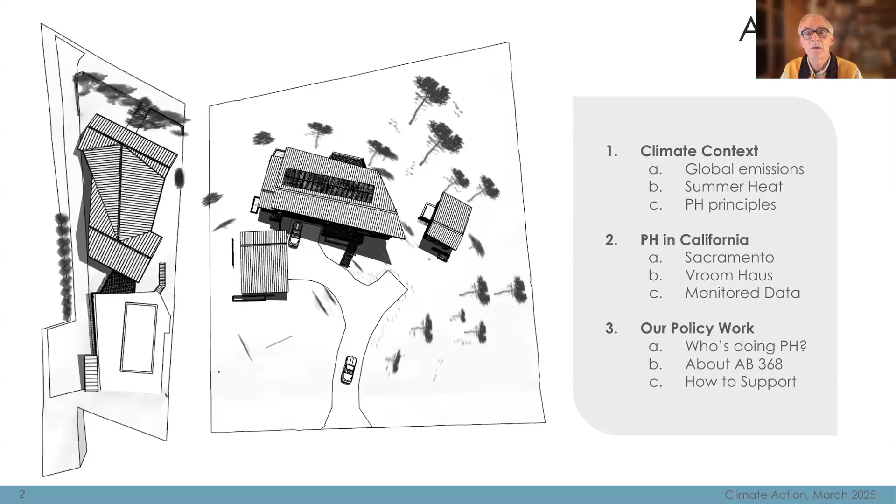So here's this villain's MO, and I'm sure you've all seen this graph many times before. This shows carbon dioxide concentrations in the atmosphere for around the last million years, 800,000 years to be specific. It's often observed that the highest carbon dioxide concentration during all that time was 300 parts per million, but that was around 400,000 years ago, well before any modern humans showed up on the scene. The background level was roughly around 250 parts per million over all of that time. As you can see, we're up at 419 now. It's not so important what the numbers themselves are, it's just that proportional difference - we're about 1.6 times higher than that background level. And it's nothing that humans have ever really lived with as a species.

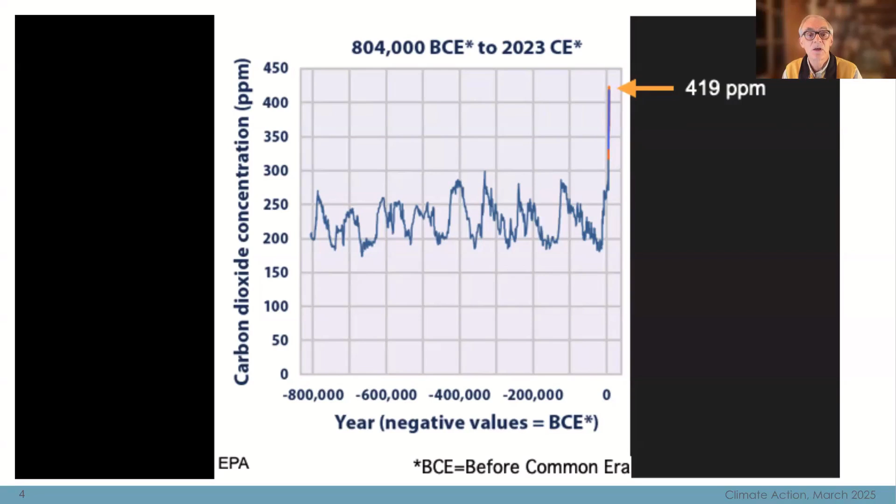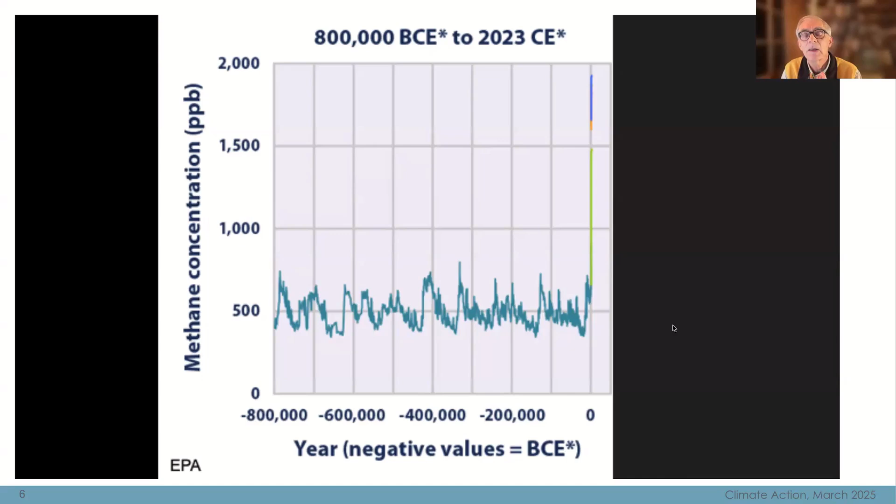So this is methane concentration in the atmosphere. All I want to point out here is that for around the last million years you can see very stable levels, a little bit of periodicity there, but until the industrial era began, and now it's rising very quickly. What I want to point out is that the level of rise of methane is very disproportionate to what we saw with carbon dioxide.

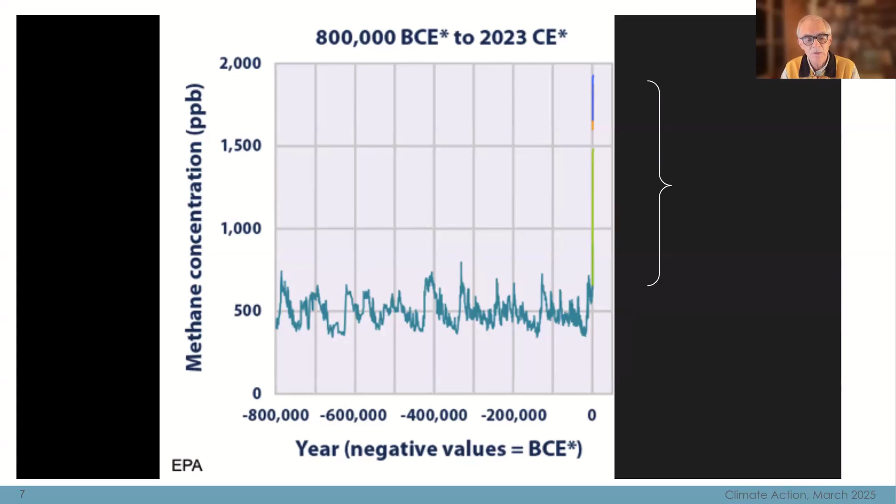Next slide, please. And that's because, as you probably are aware, the global warming potential of methane is 84 times that of carbon dioxide over the time of interest that matters to us.

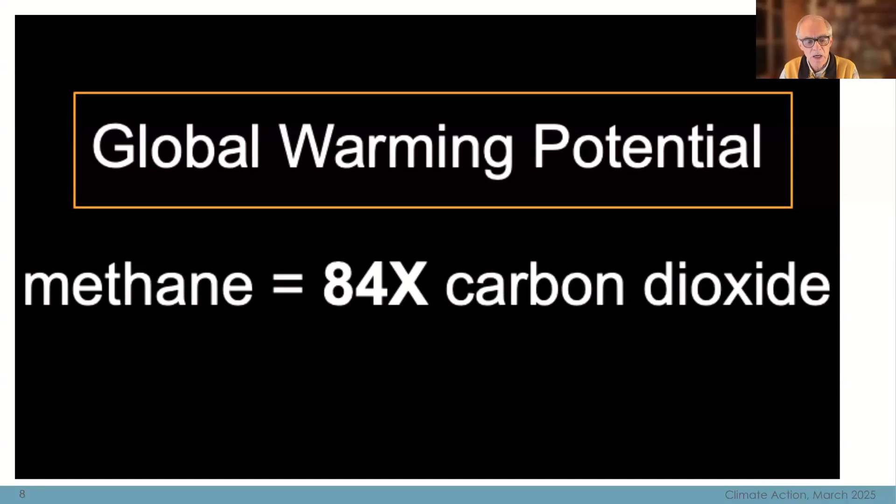So gas leaks, methane in cities are ubiquitous, and the leaks are prevalent enough to pose a significant risk to climate stability. It's as dangerous as burning coal. All the forecasts we get from CO2 entering our atmosphere, methane is contributing just as much risk.

And here, this is an echo sounder image of methane bubbles escaping from the clathrates on the ocean floor and bubbling to the surface. That rate of increase of methane release from the floor is increasing significantly as the Arctic Ocean warms.

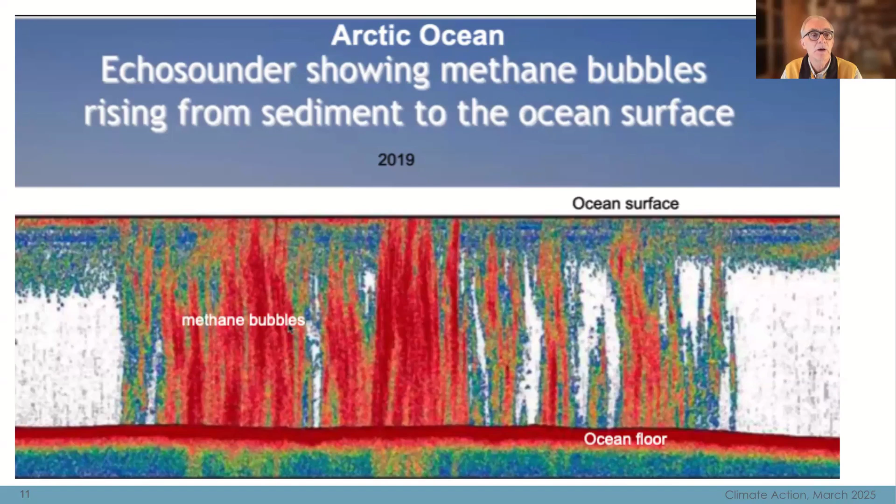So this is a distribution of summertime temperatures in the Northern Hemisphere. On the left, that grayish distribution is the 50s through 1980. And that distribution there, you can see the right-hand tail, where what used to be considered hot back in the good old days is now just an average temperature of this distribution from 2013 to 2023.

Click to the next one, and you can see the advance in the average from the baseline, the 51 to 80 distribution. We now have warmed significantly, and now we have these extremely hot tails over on the right. That's what we have to be aware of.

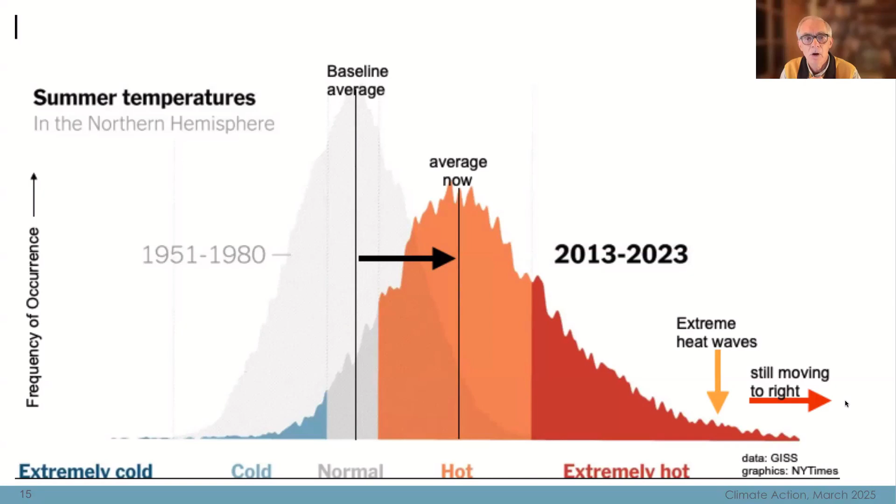So now we have these extreme heat waves that are occurring. Half of this extra heating is attributed to methane in the atmosphere. As those levels increase, we're going to still move to the right with those tails, and heat waves are going to become hotter and hotter as we continue to increase those concentrations.

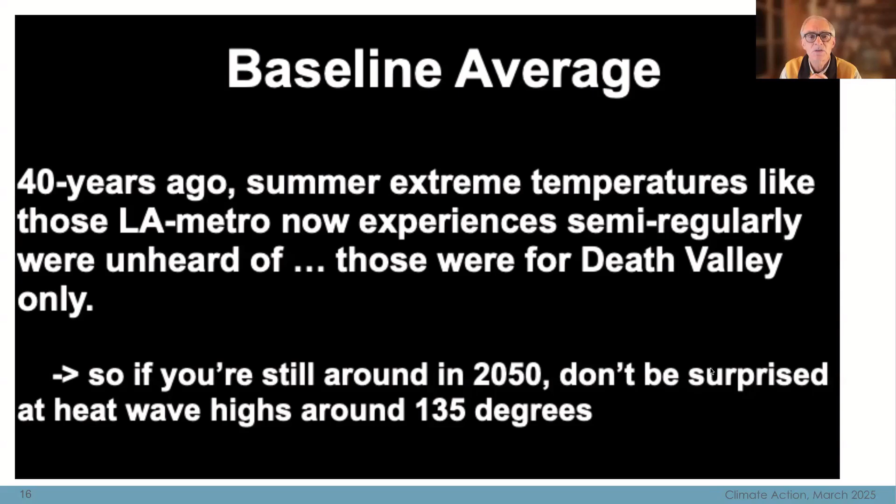So 40 years ago, extreme temperatures like we're experiencing now, occasionally in the LA metro area, were unheard of. Those were Death Valley temperatures. So if you're still lucky enough, or maybe unlucky enough, to be around in 2050, don't be surprised at heat wave highs around 135 degrees. That's not just a wag, that's a back of the envelope calculation, not a rigorous calculation, but there is some analysis behind it.

So is California's building code ready for temperatures like that? The shorthand term for the California building code is Title 24. To get a building permit, buildings have to undergo energy simulations, and those simulations have to employ a typical meteorological year, or TMY, a weather file that's a collection of average climate conditions from historical data. So even now, past data is being used for predicting performance of buildings that are intended to last the next 60, 80, 100 years.

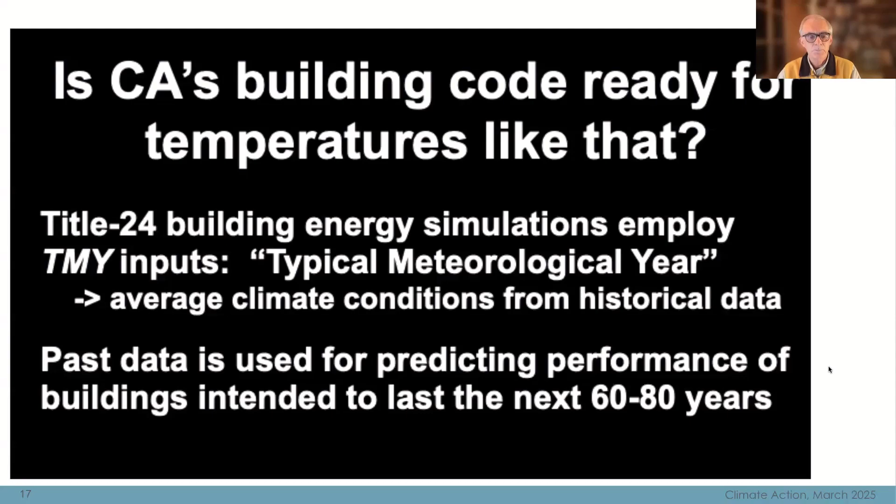So these TMY files do not represent future weather. We need to design for resiliency over the building's lifetime. Energy simulations must incorporate future weather conditions, and the California code does not require this.

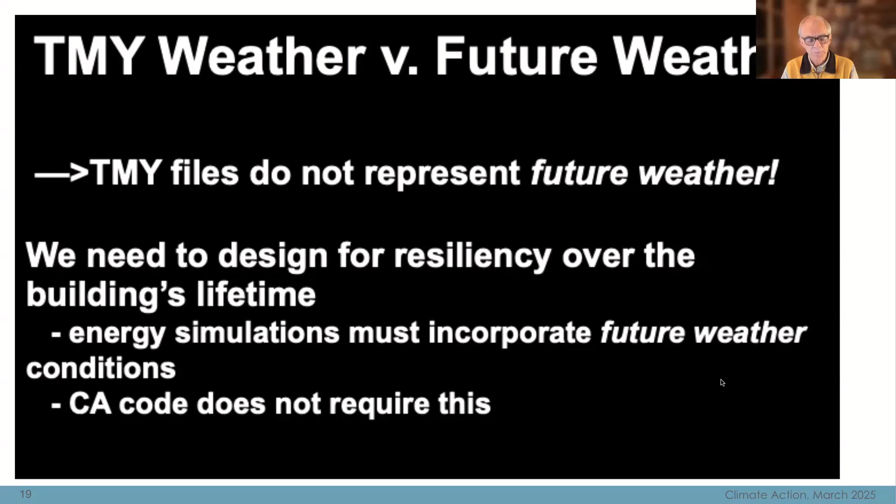So now passive house has a toolbox with a tool set that includes an option for future weather. You can see an example here from Burbank. On the left is this so-called TMY file, and then you can adjust it by increasing the mean temperature in the passive house toolbox. Now that's only increasing the mean, it's not extending out those tails, but this is at least a step in the right direction.

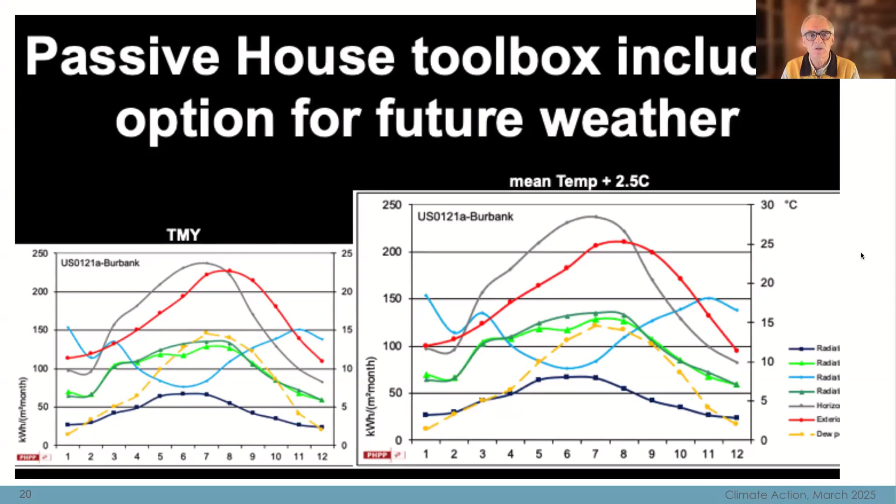And this is especially important because when you use the Title 24 procedure, it's just a black box—you stick in all the inputs that you're told to put in, and then something just emerges from the end. With passive house it's much more user-friendly and flexible, and the user has those requirements and can adjust those inputs.

Anyway, so what's so special about passive house?

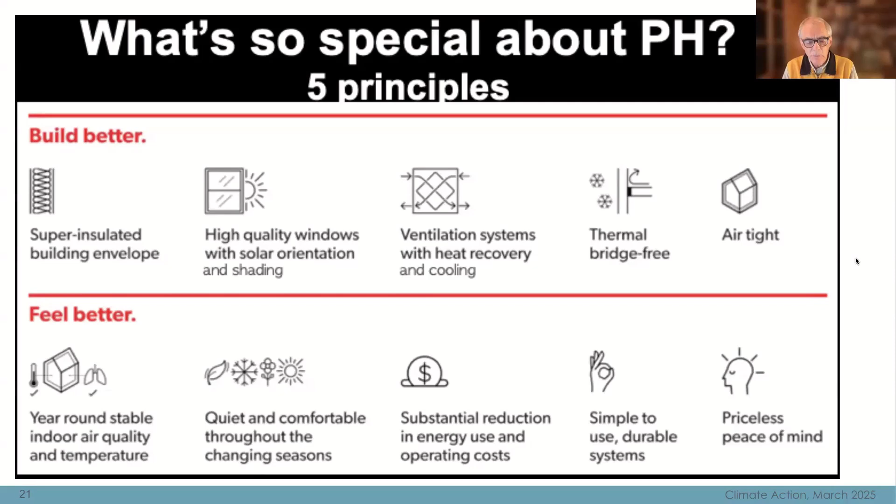In California, passive houses use 50 to 70% less energy than baseline homes. That's achievable by following 5 principles.

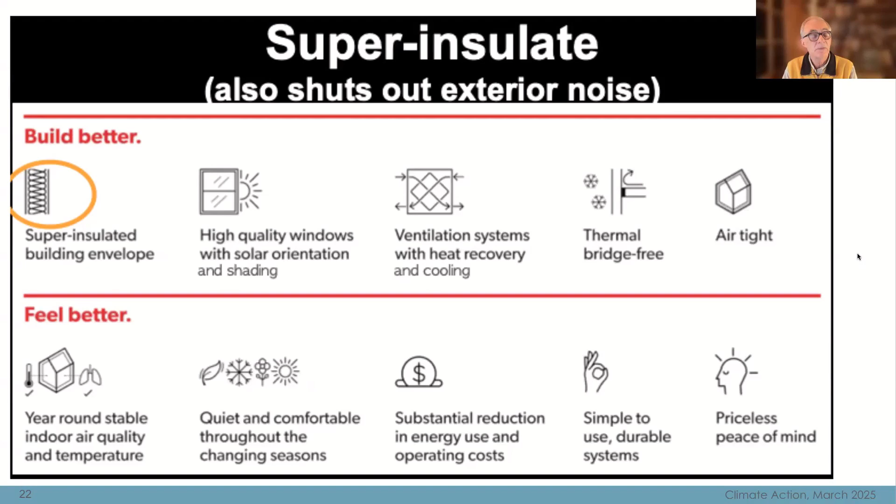So let's super insulate. You super insulate walls, floor, and ceiling, so much so that in the winter, the house can be heated with nothing more than a hairdryer. And by including future weather in their design, passive house offers even more cooling load reduction in the summer than it would get otherwise. So then another principle is installing high quality windows and adding shading where needed.

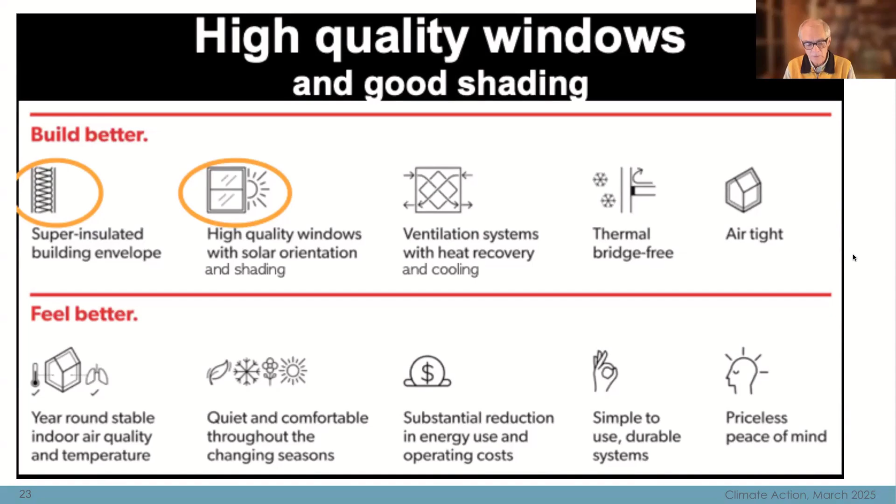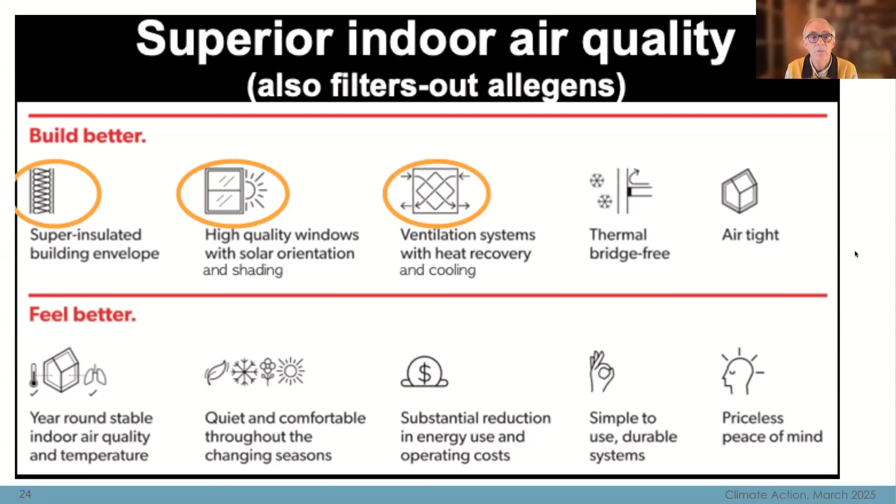Install ventilation systems with heat and cool recovery. And this also cleans the intake air because the air is filtered.

And there's something called thermal bridges. That means designing out places of excessive heat loss and gain right in the architecture. So you just design it smart from the beginning.

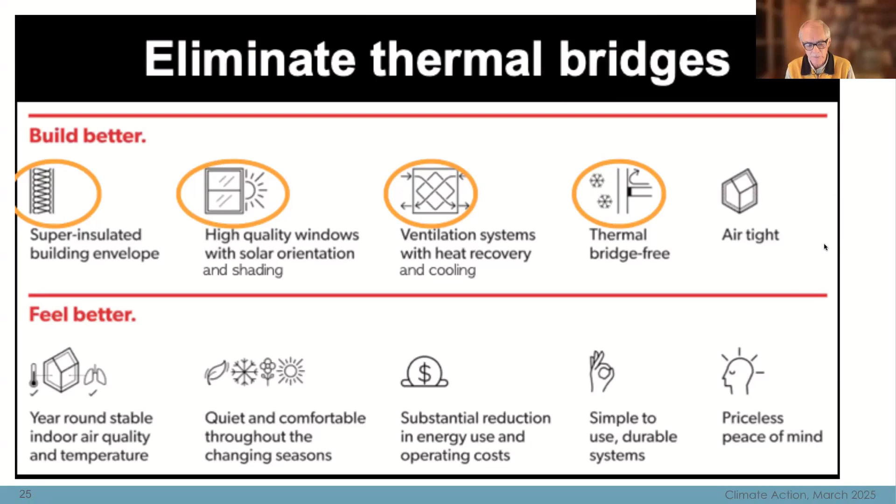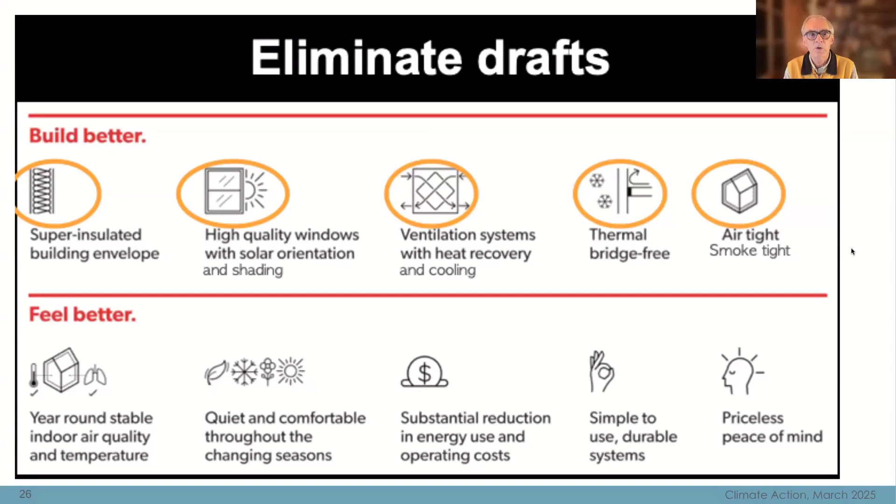And then let's eliminate drafts. Make the home really airtight and really smoke tight. And when you do this, homes really don't need much energy to operate, and they especially don't need gas, none at all. So they're just a superior kind of home for electrification.

So what does a passive house look like? Now I'm going to turn it over to Bronwyn, who is the real genuine passive house master here.

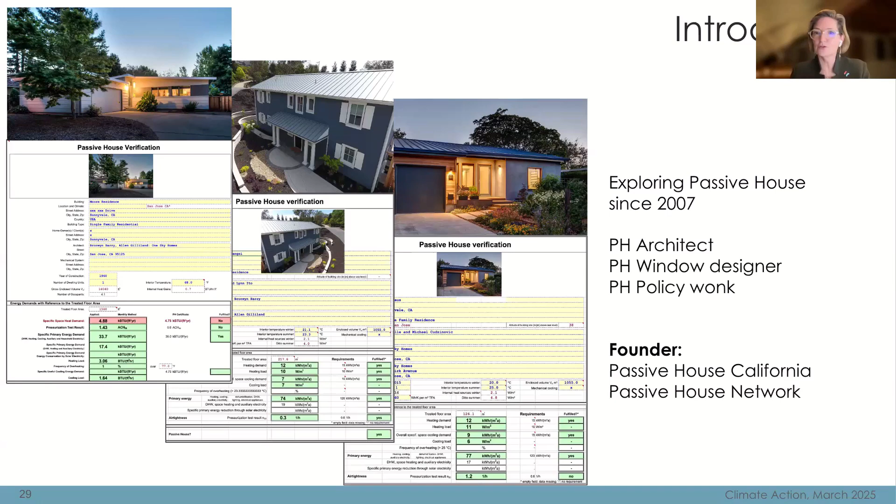And I'll share this other project. This was a winner at the Architecture at Zero competition in 2022. It's an affordable multifamily development, designed for Visalia, California — Central Valley, small sort of mid-size 4-plexes and 6-plexes designed all to Passive House. Unfortunately this project hasn't got built yet, but I'm really hopeful that will happen.

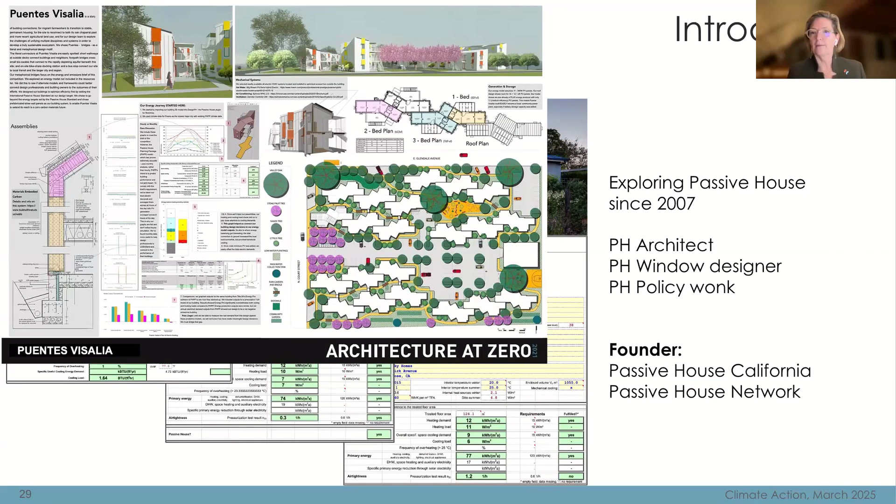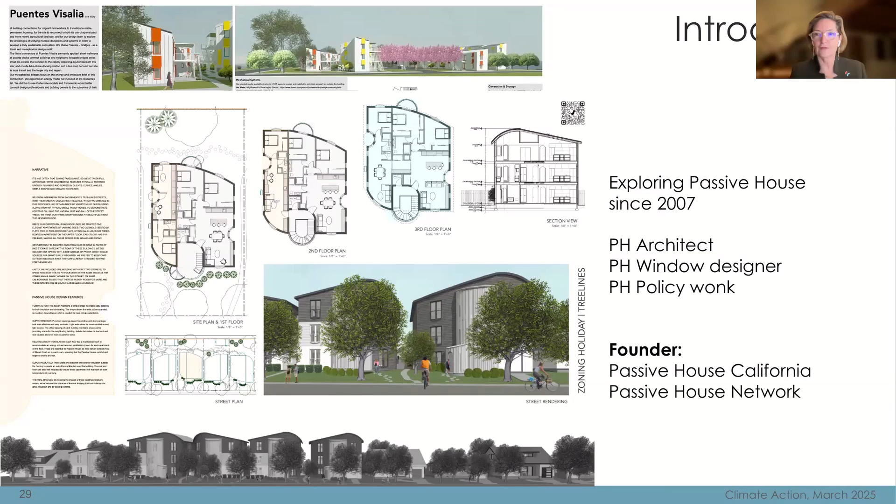But I really just want to show you some other typologies I've been working on, because this isn't just for single family homes. Another project I did for Sacramento envisions how we can build 2- and 3-story buildings that fit within the same sort of suburban street context. The streetscape is down below, you'll see it in my slides — these are actual real homes on the right here. I really want to show people how we can put these buildings in regular neighborhoods where they fit beautifully and do all the things we need to help transform our building industry here in California.

So next I'm going to show you a very recently finished project. I designed this for a building analyst who works at the California Energy Commission in Sacramento. He wanted a certified Passive House, built as a plus energy home. We reused a lot of the older existing home he and his wife were living in, and really modernized it, designed as a modern craftsman bungalow.

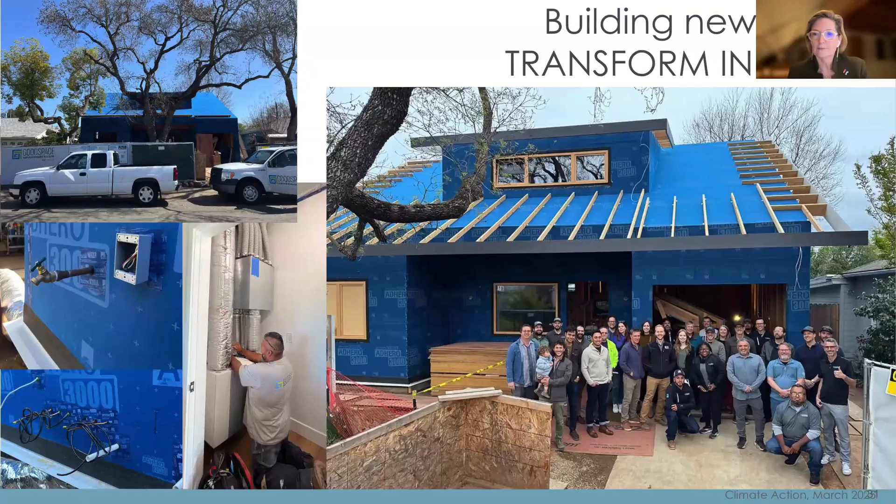This has been a great experience in helping show builders, architects, and policymakers around Sacramento. We used this house, the first certified Passive House in Sacramento, as a great catalyst for showing people what's possible. You can see how we're using all the techniques Rob outlined, the 5 principles of Passive House. We got a really super airtight envelope, and added overframe rafters overhead.

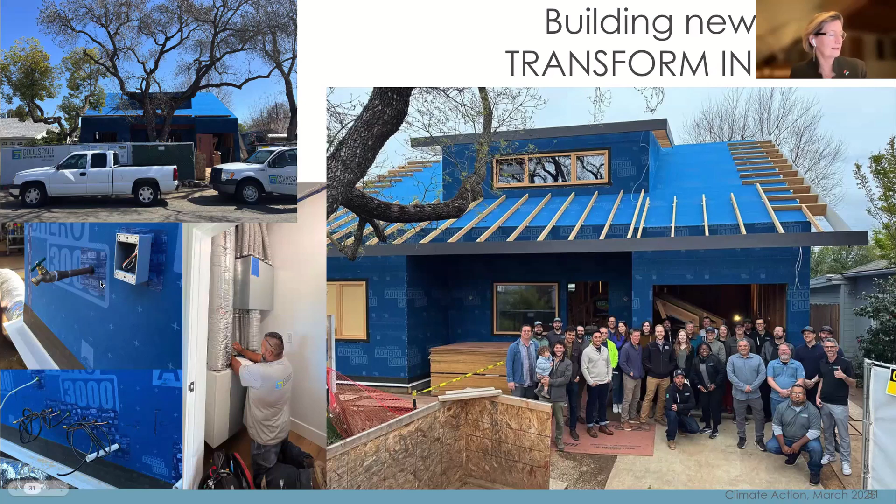On the left, these two slides show how we sealed all the penetrations, because air tightness and smoke tightness is of serious value. I think everybody now really understands why we have to build this way in California. In the middle, you see one of the crew from Good Space Builders who built this home, installing the ventilation system that allows all the air to be filtered as it comes into the house.

The crew here, this was a BS and Beer meeting that happened on the site. We opened it up for many open houses, and really it's showing not just one builder what's possible. He's embraced this, but I have the great honor of working with a lot of builders building these projects all around California, and everyone brings in other curious builders, policymakers, and architects to show them how we can do this.

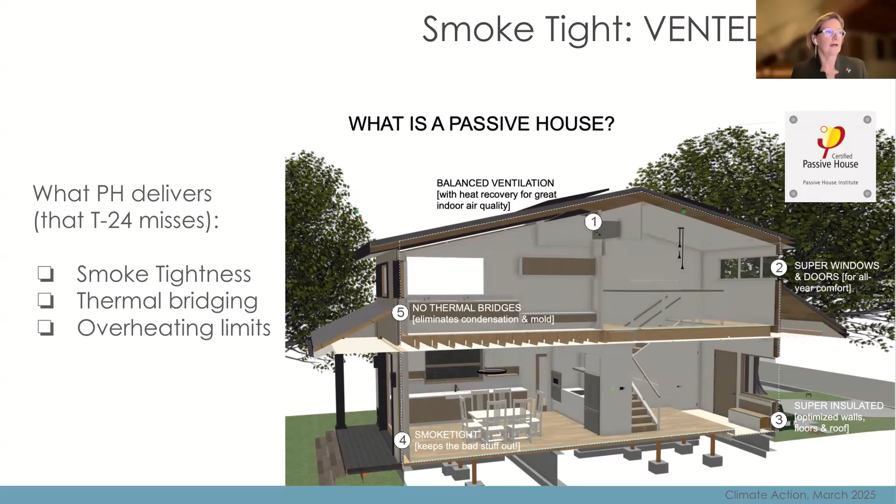The last item, which Rob touched on, is the climate data, the temperature, and the overheating limits. Passive houses have strict ceilings for what the indoor temperature can reach, and you can design that out from the get-go. But until you put that on the model and set a limit for it, it's never looked at. So these are really great superpower items that Passive House in California can support our climate goals and what we really need to do for climate resilience and survival.

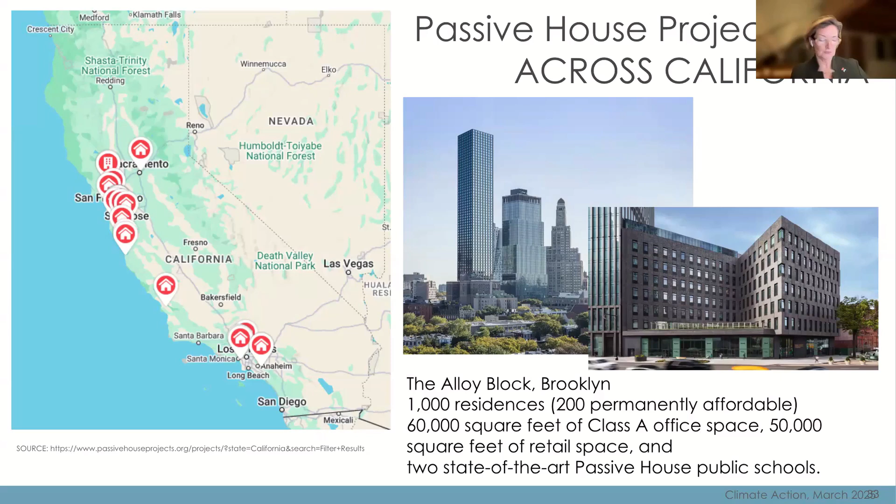I wanted to tell you, this one building alone has more certified Passive House square footage inside it than we have in the whole of California. So I have really wanted to change that number and get us caught up to all the fabulous action that's been happening across the country.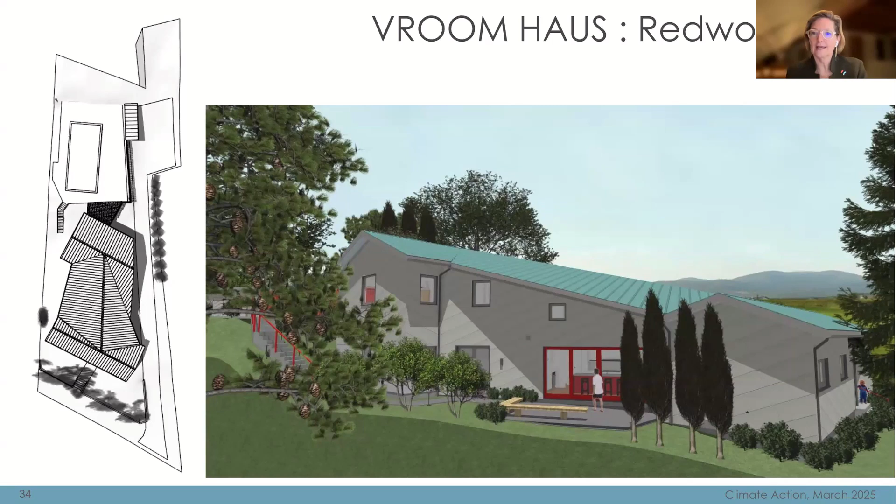Just to give you a sense, and we're digging into the policy and the strategy we're employing, but I want to tell you why we started to look at adding an alternate compliance pathway into Title 24. As I said, I've been doing this for a long time.

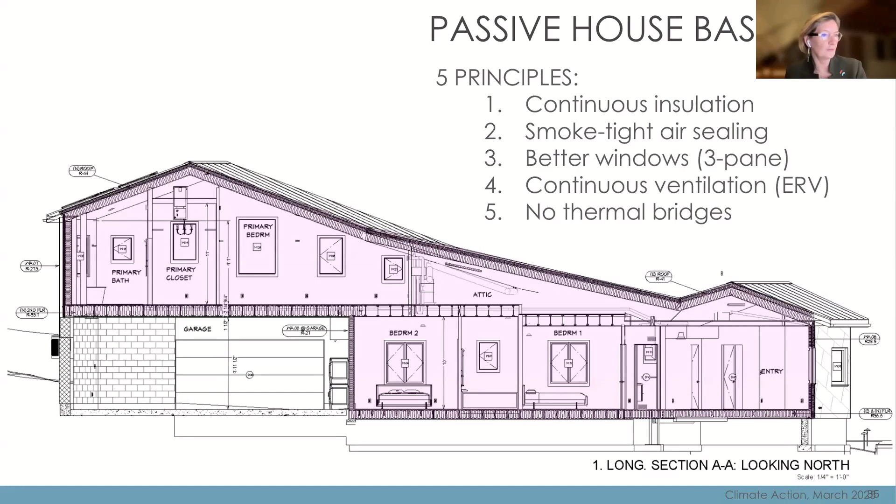This is a project I'm working on in Redwood City. It's a retrofit, sort of a partial retrofit in a new build, with all the passive house features. And when it came to my permitting, here's my Title 24 performance numbers. Here are my passive house numbers in the middle. And the blue column is the baseline bare minimum that I have to build in California.

Because I have to do a separate model for passive house that I've come to really trust and value for its accuracy, every time I submit these to my permit officials, they scratch their head and go, 'What are you doing and why are you doing this?' Because it's different, and it doesn't quite fit in the same box as what they're used to dealing with. This code official made me put this graphic together so that I could compare them side by side, because he didn't believe that what we were doing was better.

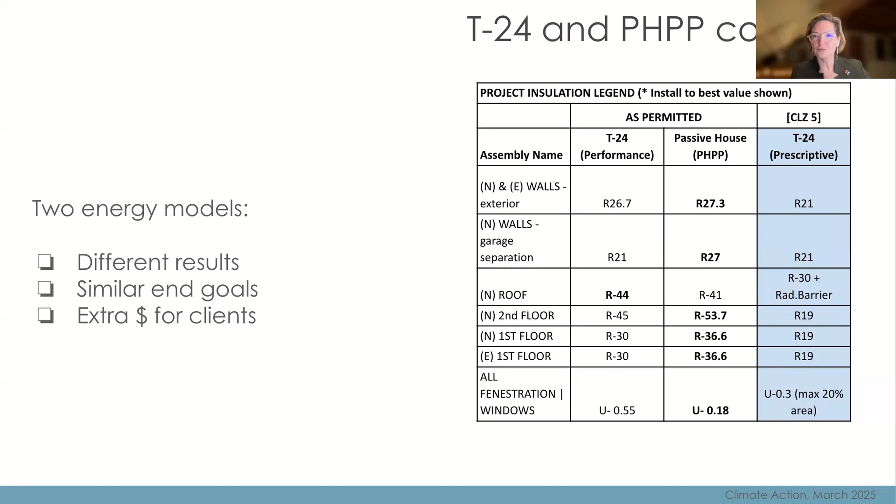So it creates constant conflict between my Title 24 model and my passive house model. I'm not going to go into the nitty-gritties, I've ranted online about this for many years, because there are always things in my passive house model that have not yet shown up in my Title 24 model. And we are continuously punished for doing better, which seems to be a bit of a problem.

So we have really done a lot of work to get verified data to help show people at the CEC why we want to do this and why we should not be blocked from doing better.

This again is the same house you saw in some of the earliest pictures, a nice 3-bed, 2-bath family home in Sunnyvale, California. I was able to monitor it for 2 years and get hourly data. This is January through December down the bottom, and the yellow line is the sipping energy that this house uses all through the year. What's so remarkable about this is it barely goes up and down over this 500 kilowatt hours line. The blue line, the light blue line, is what my passive house energy model predicted.

So we are actually way under, we're overperforming or underusing energy according to my model, which is designed to be a conservative model. The dark blue line, I managed to get, through the utility, they publish the energy data, and this neighborhood happens to be a whole subdivision that was built post-war, all the same 3 house models, all the same footprint. So pretty good, accurate representation. This is the average energy use for every home collectively in this neighborhood.

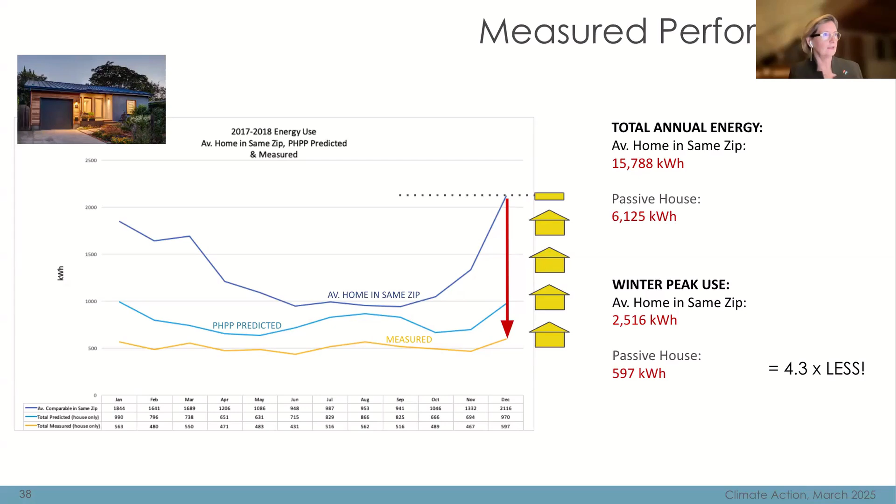I was able to send the hourly data I collected for 2 of my projects, the one in Alamo you saw there and the Sunnyvale one, to the CPUC, and they hired a company that also had hourly energy use data for 5 ZNE homes, zero net energy homes, much better than baseline code in the same climate zone. And they were able to use this data to compare my passive houses.

So the red line are the passive houses and the blue line are the ZNE homes. And what they found in summer, these are the hourly months for June, July, August, the peak cooling months, my passive house project had no summer peak, which even surprised me by how significantly lower my project was, because passive houses have traditionally been considered champions for winter load reductions.

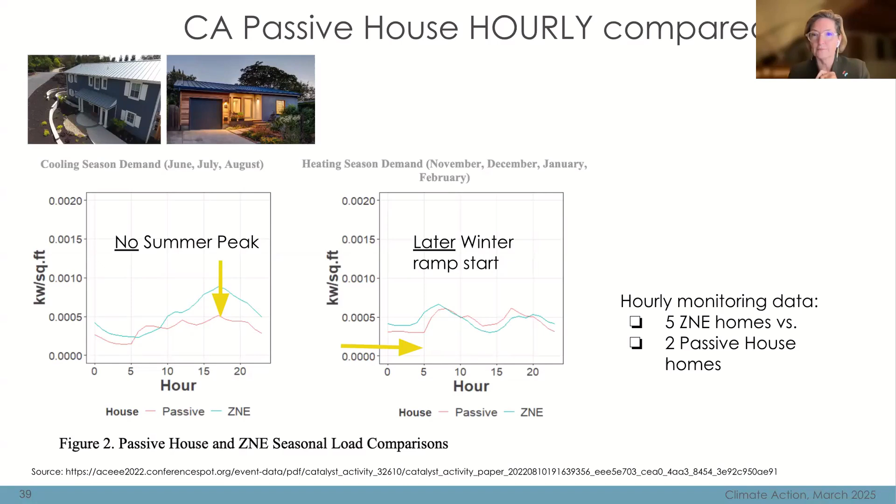So those of you familiar with grid dynamics, the ramp rates and the start times are really critical for utility and infrastructure development, particularly as we electrify and decarbonize. So there are my passive houses acting like superwoman across these climate zones and knocking the socks off the ZNE homes in the same climate zone.

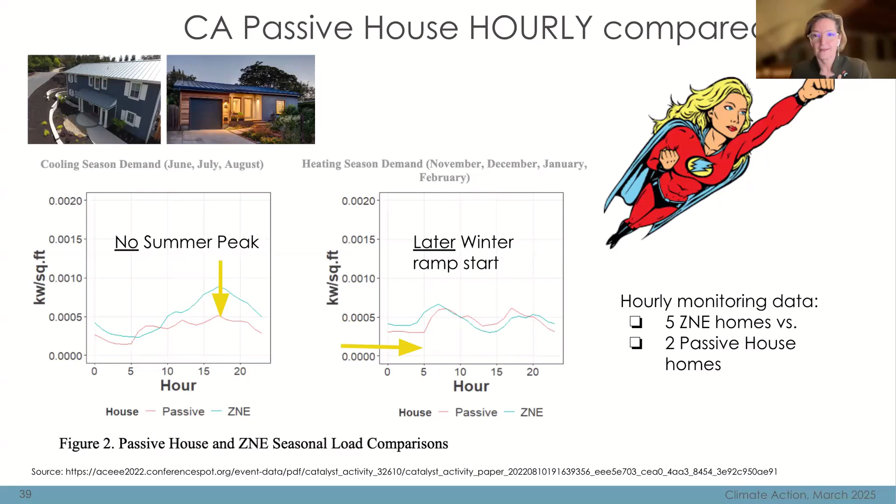And I'm not the only one who's found this. A colleague of mine, Graham Irwin, whose company is Essential Habitat, he's been doing passive houses as long as I have. He did this study finding how passive houses in this climate zone were able to, for every one code compliant building you built in each of these climate zones, you could build 6 passive houses in Sacramento that would use the same amount of energy as one code compliant building.

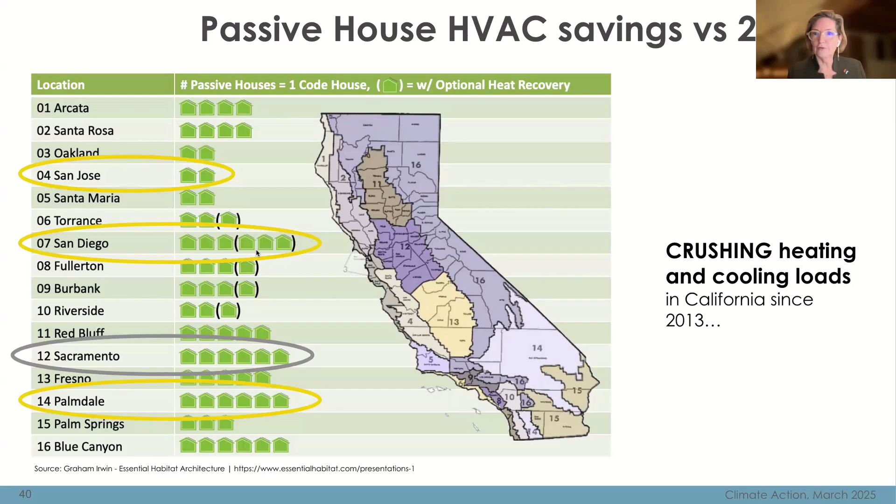And you can see across California in the milder climates like Oakland, San Jose, Santa Maria, the savings aren't quite as much, but in the hotter climates, Palmdale, Sacramento, San Diego, passive house is looking really good. And it's really helpful for all the heat load, the brownouts, because where we get our brownouts in California is in cooling season, right?

This other report, issued last year, was done by a consultant at Certifier based in Denver, Colorado, who has been working with project teams across the U.S. He collected data for 50 homes across the entire U.S., 11 of which were in California, and this map shows where they are: northern and central, one in Tahoe, and the rest down in the San Diego and LA region. He compared the outcomes in the modeling software between California's Title 24 and the various passive house standards available to us here in the US market.

Finding again and again that passive house—the PHI version, which has a couple of options, low energy building and the classic—is still significantly outperforming California's Title 24 for heating and cooling compared to the baseline standard.

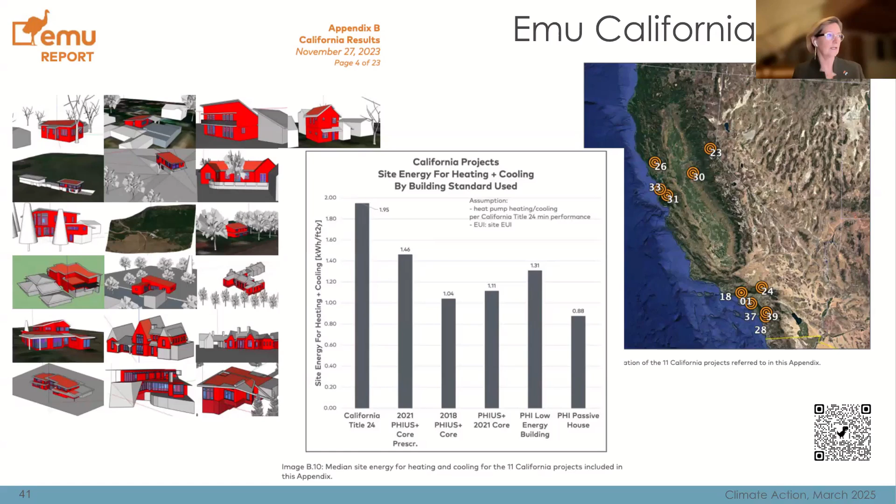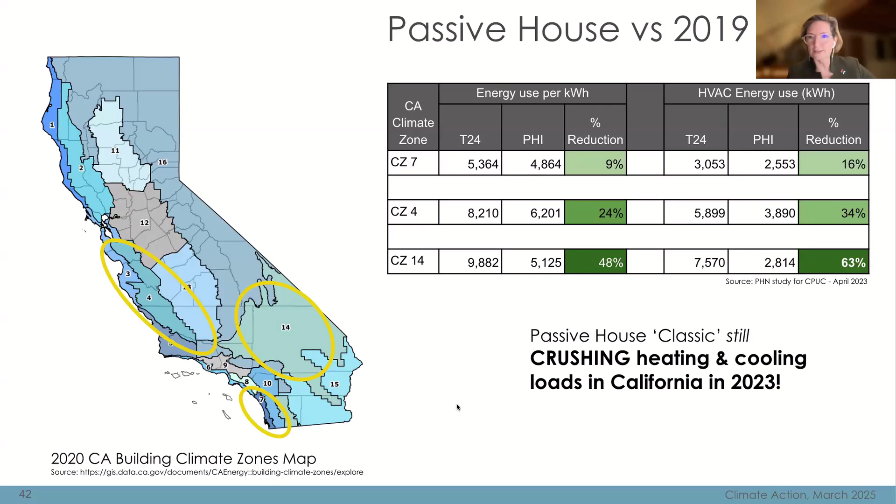When we looked at multifamily, a low-rise multifamily building for a study we were supporting CPUC on, we found in the climate zones where they predict most multifamily buildings will be built—climate zones 4, 14, and 7, you can see exactly where they are geographically—again double-digit savings reductions, except in climate zone 7, which is the pretty mild San Diego area, in total energy use. But the savings were significant in heating, ventilation, and cooling energy use, up to 63% in climate zone 14, that hot Central Valley area.

Rocky Mountain Institute has released a study on passive house resilience. It was done for a cold Minnesota climate, but the function and the result for a hot climate would be approximately the same, because what passive house does is allow you to keep the cool air in longer and keep the heat out for longer during extended periods of utility shutdowns.

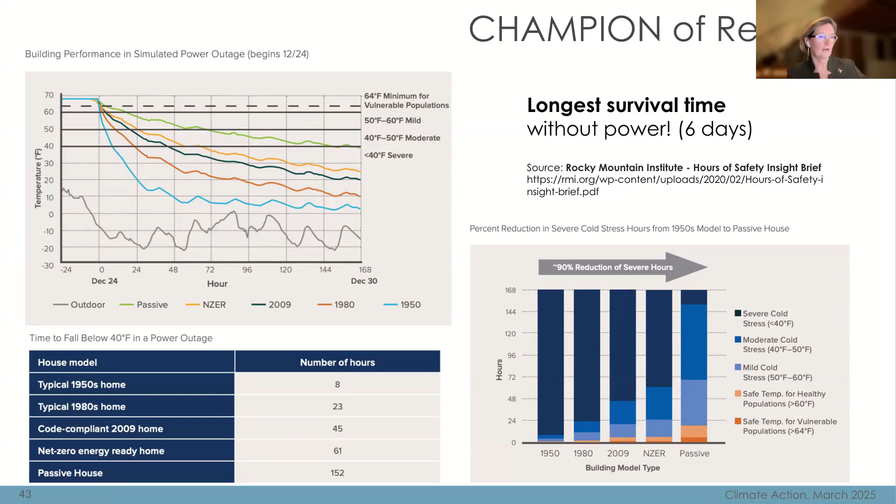You can see on the top left here, this chart, the green line is the passive house building, which was able to remain habitable for much longer, and never went down below the 40-degree cutoff of habitability. This was for 168 hours, so 6 days of extended utility shutdown, again proving that we really have a resilience champion on our hands, that we are able to deliver this.

So we've given you lots of data here, and I want to now bring it back to the policy narrative, because what we have found here in California is that really being able to do this more regularly has been very hard. So we did a big research study, and we looked at who else was doing this and how they were managing to get more projects built that really supported industry transformation.

The first region to really leverage passive house as a real tool to transform its entire building industry was Brussels, starting around 2004. They put out a call for projects to submit to show how they could do better. Brussels was actually one of the worst offenders in terms of building emissions in all of Europe, which was very embarrassing given that they were the headquarters for the EU. They established a program that offered incentives, training, and a little bit of financial support for early adopter front-runner projects, all of which chose voluntarily to use passive house.

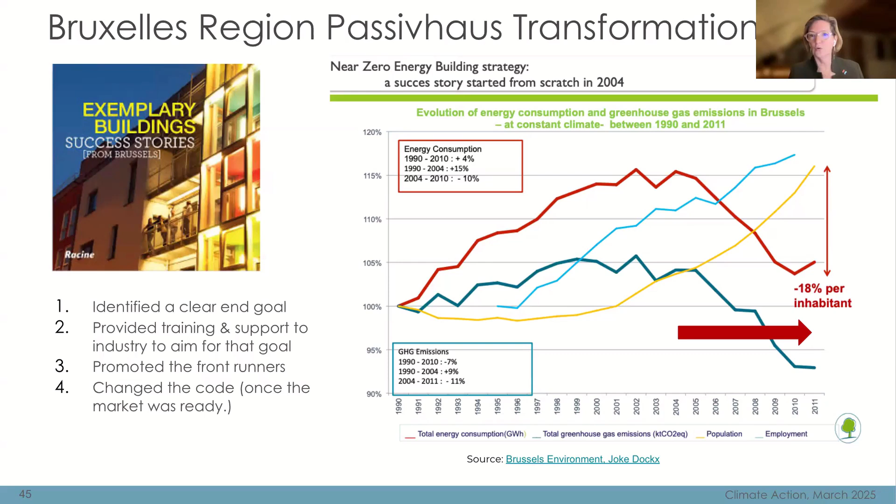Massachusetts also learned of this program in Brussels and decided to implement a very similar one. Massachusetts put together an incentive program that offered training to professionals, incentives for energy modeling their projects to passive house standards, and a little bit of financial support for front-runner projects to help cover the cost differential.

In the 8 years they've been doing it, this has allowed them to reach a point where there are now 21 municipal districts in Massachusetts that require passive house certification for all of their multifamily buildings. And they have transformed their entire baseline code to mimic passive house.

Vancouver did a very similar thing. They also heard about Brussels and said, okay, we could do those things. We can remove the barriers that make this easier, we can add incentives, and we can develop our own. Vancouver now has the largest portfolio of certified passive house city-owned buildings in Canada.

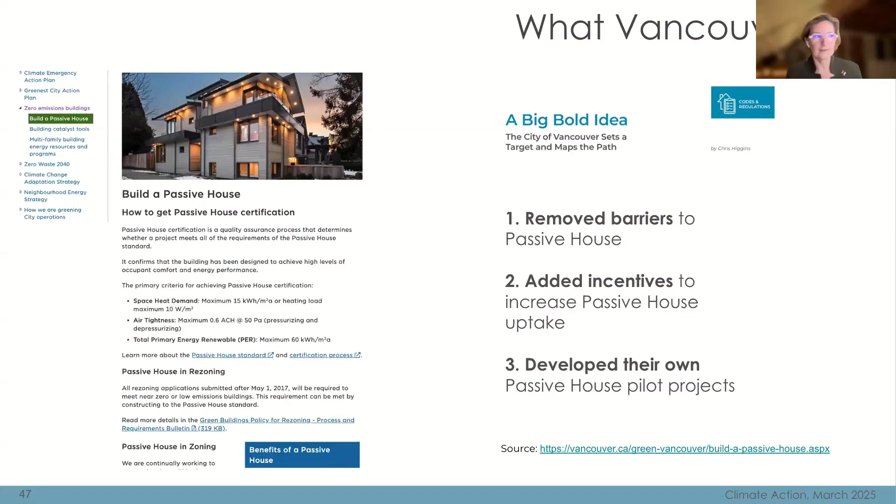So you see the general trend and we see the pattern. Not only has Vancouver done this, New York is doing this. That building I showed you in Brooklyn didn't come out of nowhere, and there are dozens of these going up all across New York, Massachusetts, and the Western states.

So how do we replicate this in California, and how do we get more of this here? We put together a development roadmap. We did all the research, inventoried where the projects were, and mapped this all out.

We created this paper we presented at ACEEE, at the Grand Poobah Policy Conference of the North America. We put together pitch documentation that gives all the reasons why, and then we created an action plan. And lo and behold, the pathway was very simple.

This replicates the exact pathway that Brussels, Massachusetts, New York, and Vancouver have all done. It's really simple, and not only does it support passive house, but this is how we transform our entire building industry. So the first step was an alternate compliance pathway.

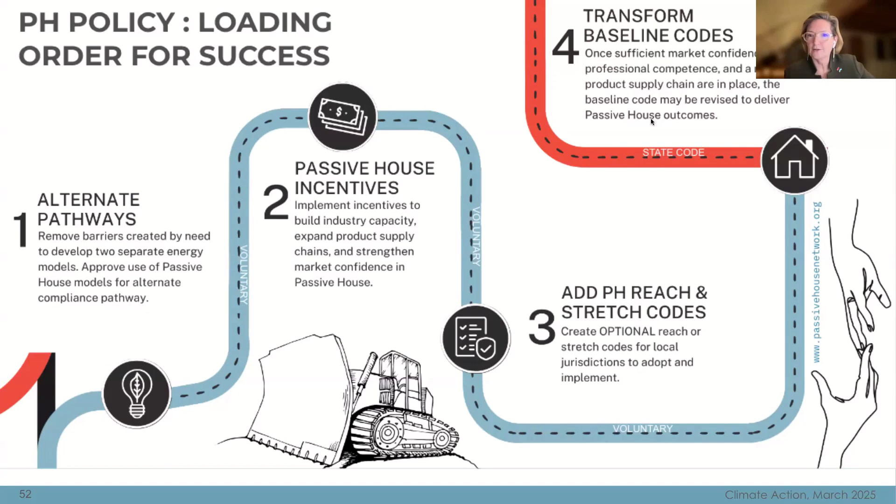Get the barriers out of the way, and then you get incentives in place - we could actually spend a whole program on that. Then you add stretch and reach codes that help support the front runners a little further. And then you come back and transform your entire baseline code, because everybody already knows how to do this.

Which is where I get to hand this back to Rob to tell you more about how we're starting on step one here in California. So take it away, Rob.

Yeah, so my input here is very simple because the bill is very simple. Just let's go ahead. So what we've mentioned before - it's AB 368. The author is Assemblyman Christopher Ward, and the essence of the bill language is in the white text. That's all it is.

It provides an alternative compliance pathway in Title 24 for passive house, and that is subject to California Energy Commission evaluation. That's the essence of the bill language, that's what it says. And it can do that because passive house already has a defined set of criteria and standards.

And just to round out what this does, as Bronwyn has been saying - in the gray text, if we provide a law like this, that will eliminate obstacles, hurdles, and extra fees that are now present in building climate-safe structures, homes, and multifamily buildings.

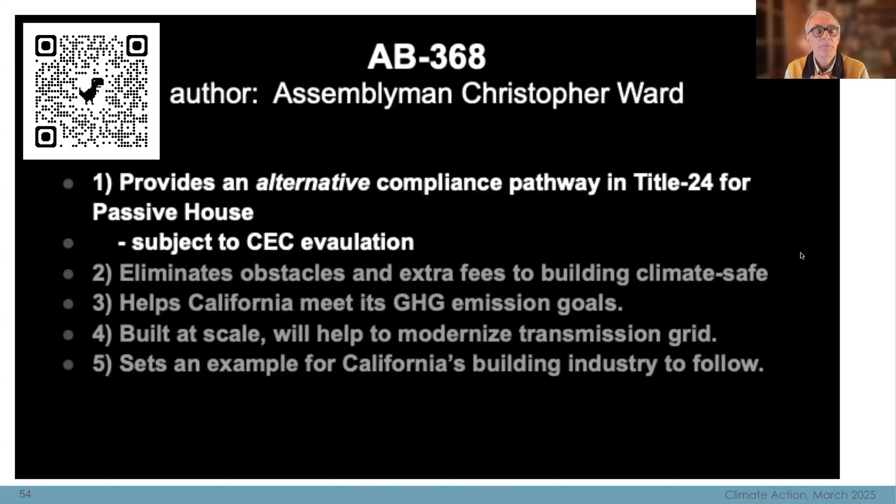So that's the bill we have, and that's what we want to see passed, fervently. This is Chris Ward - he's adopted, he's now pushing for AB 368, and please help us support this building industry transformation.

I mean, this will be really significant. It's a little bit like flying under the radar, okay? It's nothing like polluters pay or any of these very grandiose and admirable bills. But this one can have a significant effect because it's something that everybody does, we live somewhere, and as it filters through the whole state, this can really help draw down our emissions.